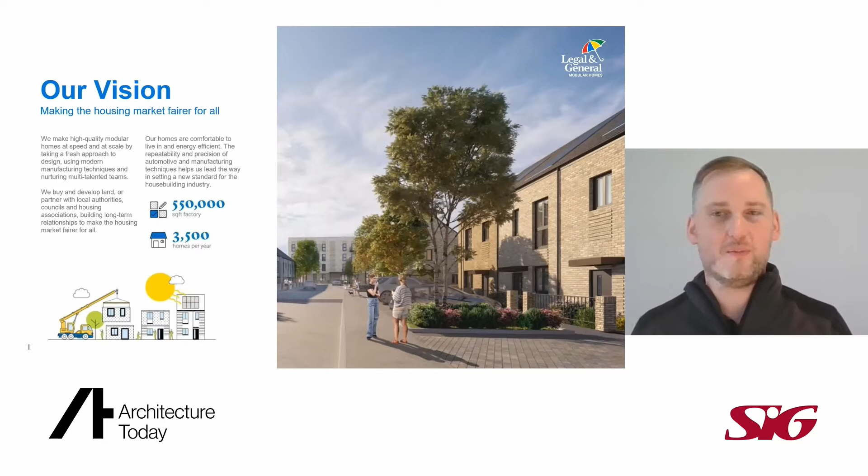We do this through a fully integrated delivery, having influence and stakeholder engagement right from planning all the way through the process, through design, production, construction on site, and then into sales and aftercare, ensuring that our customers have a great experience with us from the minute they engage with us through into occupying and living in their homes.

We do this through a mixture of in-house capability and partnering with third parties at pretty much all stages of this process, but really focusing on delivering high quality design, both in terms of product, place and process, to allow us to deliver on our commitments as we walk through the life cycle of a project.

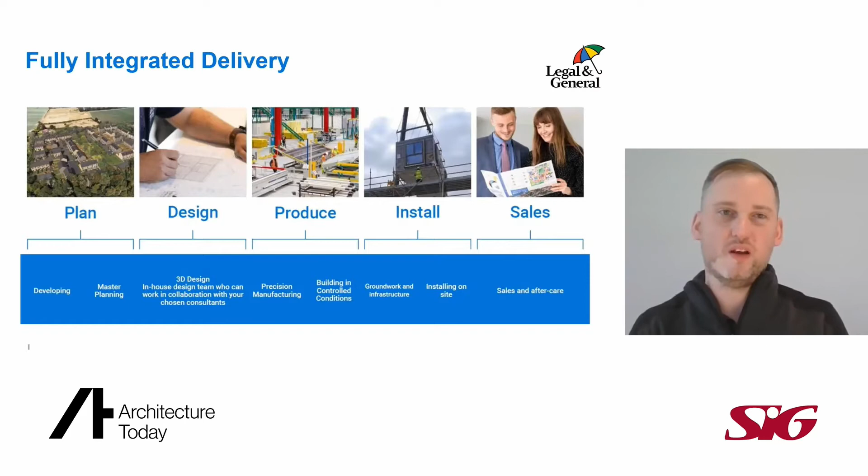Just to give you an overview of the products that we're developing, they're all underpinned by six key themes of comfort really, and ensuring that an end user values the space in which they live and call their home. So we start here with space standards, ensuring we achieve nationally described space standards across our products, providing high levels of acoustic performance and thermal comfort in excess of building regulations and minimum requirements, really looking to up the bar in what the consumer can achieve and expect to receive from their home as they occupy it.

And that moves into indoor air quality and daylighting, again ensuring high levels of comfort and operation within the homes as people use them. We achieve EPC A as standard, so moving that benchmark forwards through a fabric first approach, removal of gas and use of technology in terms of heat pumps for heating and hot water. We've already achieved that as a minimum baseline and can offer then net zero carbon as we move forwards towards a more sustainable future as an industry, we hope.

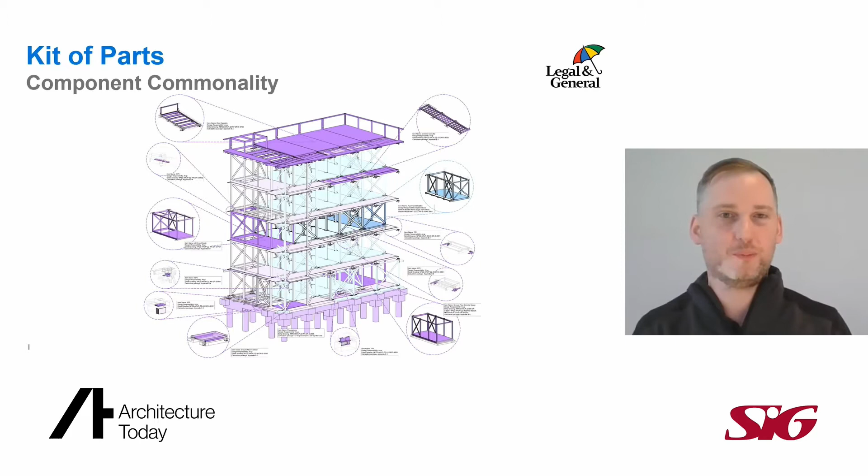We're able to get the throughput through our factory production line by limiting the amount of components we send into the factory. So working on that standard kit of parts. But then we put them together in ways that deliver different outputs. And what we have to negotiate here is the difference between customization and configuration. So the difference between defined choice and absolute choice, because we have to maintain a throughput through the factory, but also meet the customer requirements at the end of the journey.

This then starts to flow into site because the factory is only part of the puzzle really. The job isn't done when the module is complete. The modules have to come together, be constructed into buildings and finished from foundations through the install, into the facade and tie up into the roof, and then the external works that creates the development. And we take a similar approach to our sites. So that standard library of detailing, of interfaces, standard elements of work and standard processes that we roll out between all of our sites to ensure we deliver consistently.

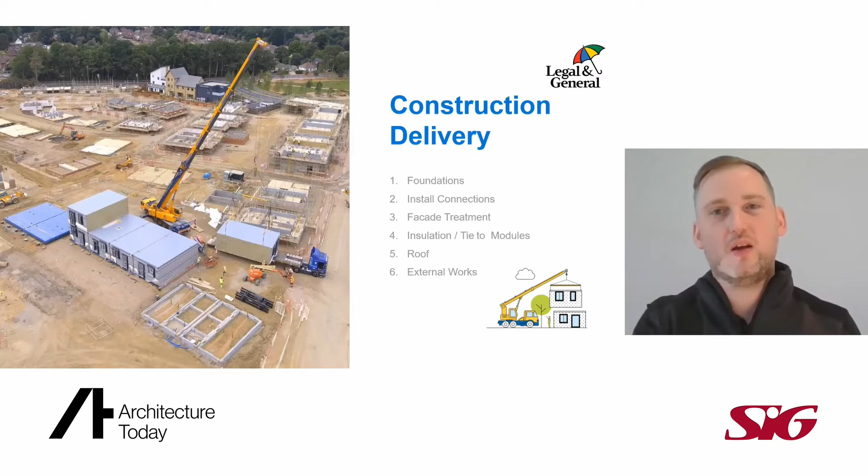So what you see on the screen there is really a visualization of our build process, starting from sub-assembly, taking as much complexity out of the online build and doing that in areas away from the line to allow us to purely drive assembly in a flow production route through the factory. We then have station by station set work repeatedly done. So regardless of which module we're building, they each reach the same level of maturity at the same point in the process.

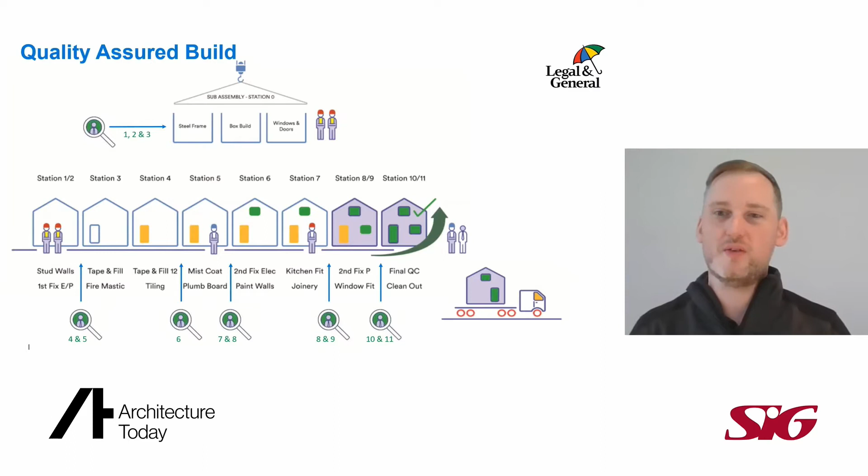And then at the base of the image there, the magnifying glasses are the quality checks that go into place. So this is really defining what we term as critical to quality, borrowing techniques from automotive and aerospace, where we look at critical failure modes, what could go wrong, and therefore what controls do we have to put in place so that we drive the right level of efficiency into the process.

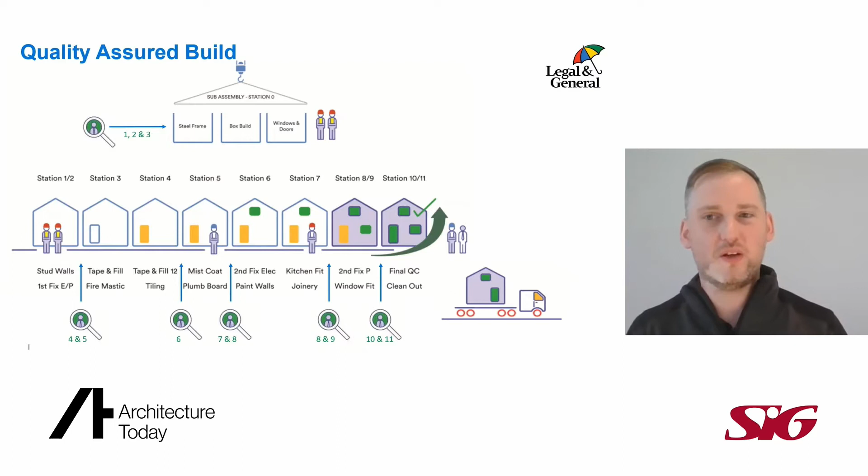So how the factory then takes the design, puts a construction process together, and then controls it is really key to us, going back to the beginning of this presentation, hitting the volumes we need to achieve, but hitting them in a repeatable way that consistently delivers quality to the end user. Because after all, this is about delivering fairness in the housing market and allowing people to up their expectation of what they should receive with a new build home.

We take the same approach on site, and traditional construction follows a similar process. We are engaged with the NHBC from a warranty provision point of view, so have formed our site processes in conjunction with their sign-off processes. And again, the graphic on the screen really visualises how that comes together. Again, control points at the right point in time to ensure that we don't carry a fault forward from one stage to the other. We avoid remedial works and rework from that perspective.

I think it'd be useful to then give you some context as to what does this look like in practice, and what does this look like as we build into a community. Because again, we've gone from the small parts of the construction into the modules that come out of the factory, into the dwellings that get put together on site. But they only work as a scheme when we can put them together into a community with a sense of place, with a sense of purpose, and with a sense of community being built into what we deliver.

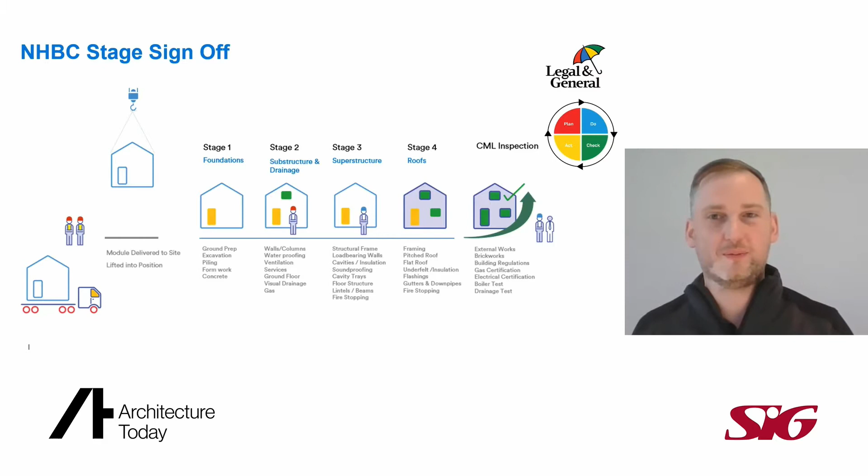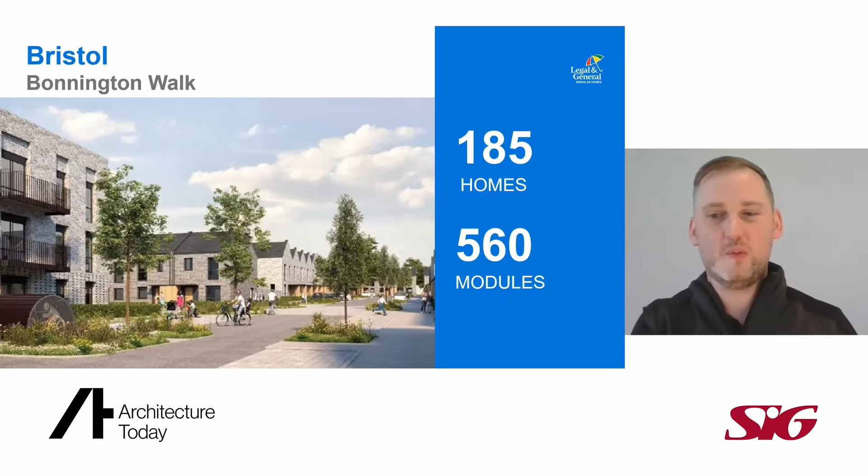So I'd just like to show you our site in Bristol, which is in Bonnington Walk, just north of the city centre. We are delivering 185 homes, and that takes around about 560 modules for that delivery. We are delivering a mixture of all of our product types. So you can see in the image there some houses in the background and an apartment building on the front left of the image. So 2 and 3 bedroom homes, 1 and 2 bedroom apartments.

The site itself was a piece of brownfield land located next to existing residential usage. There's a railway line to the south of the site, and areas of ecological interest within the large areas of trees, and also some protected species in there that we've relocated as part of this project.

And you can see from the layout, we're creating a space here that not only creates a place to live in your own home, but creates space around the dwellings to live in. So high focus on cycleways, pedestrian access, as well as the use of the car, creation of green spaces and spaces with different settings and different contexts to allow different usage as people go about their day-to-day lives.

And this is the intent as to what this will look and feel like as we work through the development. So real focus on how the public realm works in terms of hierarchy of transportation, use of green spaces and how the green spaces tie into the hard landscaping, and how we create a sense of character within what, to be honest, could be quite a stark, long street, but using features to break that up and create a sense of place and character.

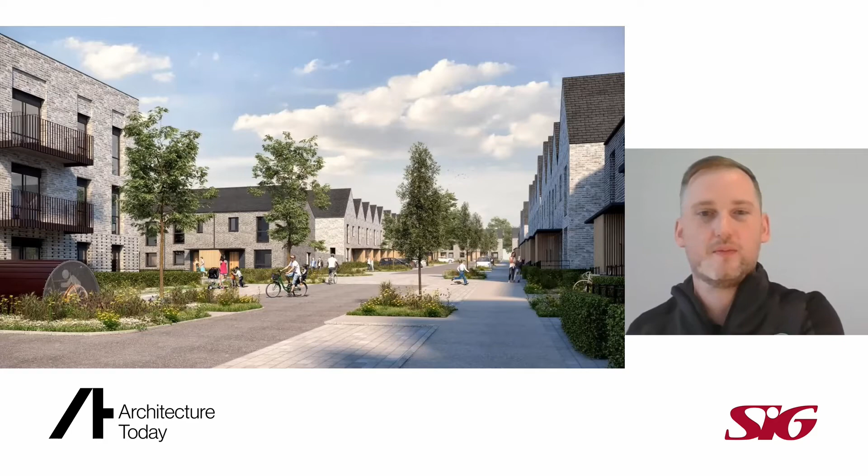And you can really see this in this layout where we can highlight the areas where there is density in terms of dwellings, where we have areas of green space that tie into the existing usage of the site and make great use of the natural features that were already there. How we've segregated cycle and pedestrian routes through the sites to ensure it's easily accessible for all users. And creating different spaces with different purposes.

So capitalising on the existing community orchard within the bottom section of the image there by allowing the provision of new allotment space and tying in with what was there already, creating community squares and gardens within the landscaping and breaking the landscaping up into different areas of different character. And then also creating an area within the landscaping for the protection of the existing ecology, some of which has been relocated as part of the works.

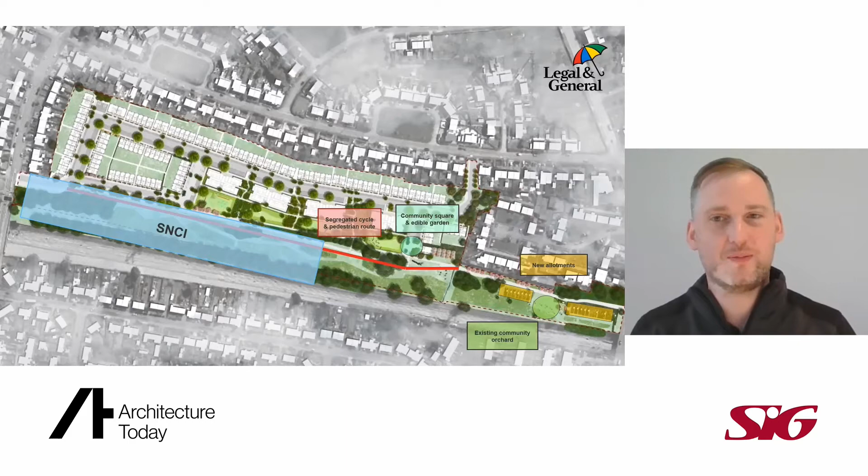And then from the 3D cut through here, you can start to get a feel as to how the site comes together with the provision of public open space, clear usage of the main thoroughfares for access, and then private space to the rear of the dwellings. And again, from the other side, really demonstrating the extent of open space within the development itself, offering people not just a place to live, but a community and a development with options as to how you live your life.

So we've talked a lot about the development and the product itself as a house type, but actually we think modular then extends to all elements of the build. We're currently delivering the houses in a modular way, but how do we transfer MMC kit of parts approaches into elements of the build that aren't the primary house itself? And I think a really good example of this that fits into not just the character of the development, but also how people live and our strong drive for sustainable development is actually how we've dealt with a specific component to deal with waste and recycling.

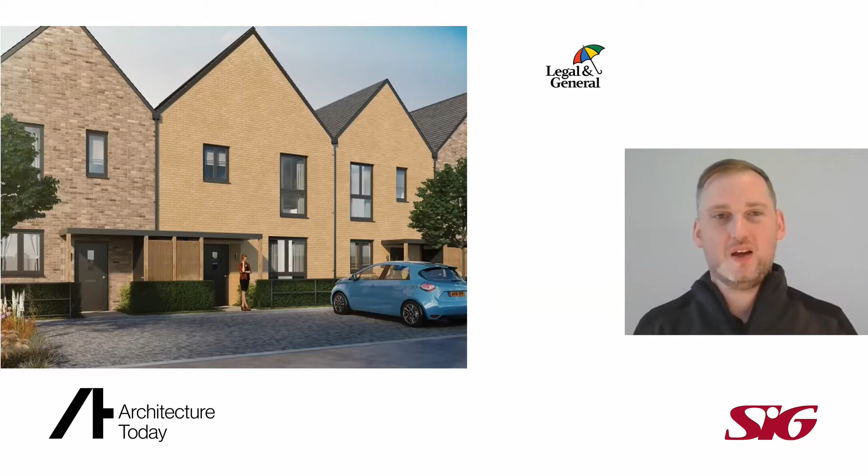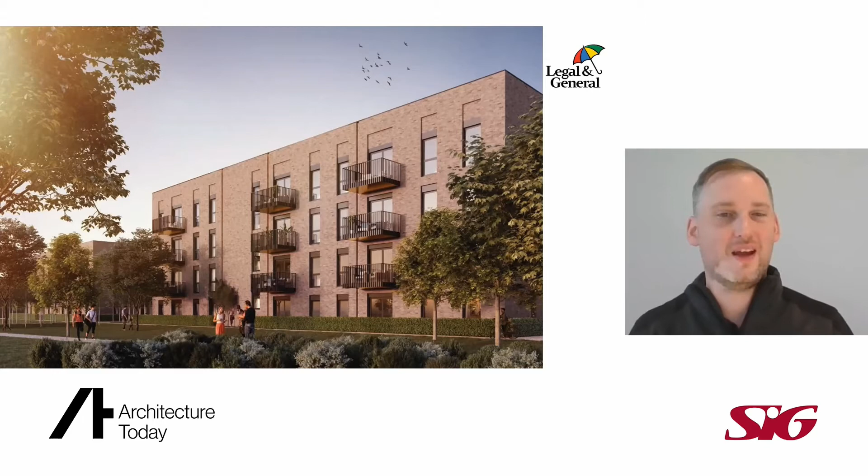And that then goes into the apartments themselves as well, and I'll touch on this later as we go through the build-up of the apartment and how we have bolt-ons to the core, so to speak, of the building that allow us to create variants both in the facade, the fenestration, and elements that are applied to the external elevation of the building.

So just to give you a walk through our products, these are the products that are being delivered in Bristol. So we have a 2-bedroom home. These generally are semi-detached or terraced, M4(2) compliant to NDSS standards. And you can see there from the layouts, spacious with clear provision for storage, and a functional layout that works with how people live within their homes. Again, exceeding very slightly NDSS standards.

I'm looking for elements that give an increased look and feel and feeling of comfort while you're within the building. So you'll see in the image on the top left, full height windows to the upper floors. And this is a really good example of us marrying together the construction process with adding value to the customer. So that window actually came about through integrating the design of the product with the design of how it is built. That's obviously a first floor module, and as we go down the line, we need access into the module to complete the works.

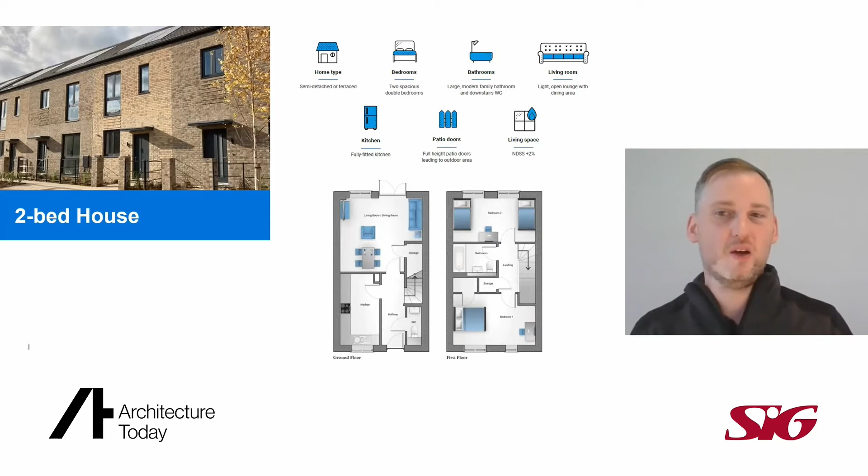So we had a full height opening in the module as a necessity of process. We could have filled that back in and put a normal window with a sill in, normal whatever that means in design context. But we chose actually to use the hole that was created by the process to then give us an enhanced design feature in terms of the full height glazing, which then gives a light and airy feeling in those upper floor rooms.

That then continues into the 3-bed, and you'll notice there's what is quite a solid, thick dividing line running top to bottom on those layouts. That's actually where 2 modules meet per floor. So our previous 2-bed house is 1 module on top of the other. This is 2 on top of 2.

Again, this then works the other way. This is process constraint driving the design. So the width of this dwelling as a single unit would be prohibitive in terms of transportation, access, and limiting our ability to get to sites. So there is a practical aspect here of breaking this elevation down into building blocks that are repeatably deliverable across a wide cross-section of the country without constraining development opportunities at a land-led level.

And again, you see a common theme here with the text at the top of the slides as to looking at comfort around space, open plan living, height, air quality, comfort, and making sure that people want to live in these houses. I think as MMC becomes more prominent and has done over the last few years, we're really challenging the preconceptions around modular housing.

And I think flashing back to the images I had at the beginning of the presentation, where you really can't tell the difference between the photograph of the show home and the CGI that was created in the process. It's that real commitment to quality that just doesn't mean that MMC is a faster but lower quality product. Actually, MMC can be a more repeatably delivered higher quality product as a result of the processes that we use.

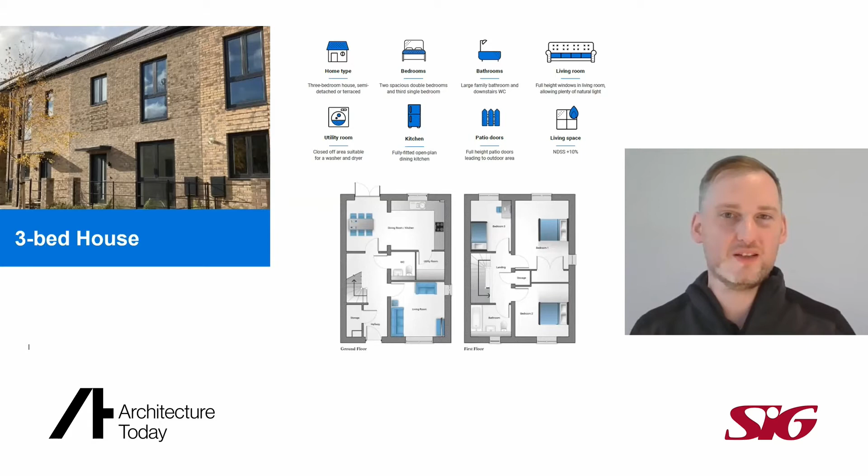And then the apartments really then demonstrate the next level of the kit of parts coming together. So again, similar themes throughout in terms of space, height, openness. But really here I want to talk about how the layouts between the 1-bedroom apartment on the left-hand side and the 2-bedroom apartment on the right-hand side allow us to use that standard kit of parts to develop quite a bit of variance.

So you'll notice as you go down, the single bedroom with the family bathroom off of the main living space is the same between the two, as is the module underneath it with the utility cupboard and half of the open plan living space. You then get down to the third module with the kitchen and the dining space in. The only real difference between the 1 bedroom and the 2 bedroom is the door and the service connection then into the ensuite, which is the 4th module.

So with 4 modules and the 3rd module having a minor variance, we can create 2 completely different properties, i.e. the 1 bed and the 2 bed. We then have a configuration where the 2 bed can come with or without the ensuite. And this is where we're driving configuration over customization. What are the allowable choices that allow us to get to a variety at a site level, but standardization in the build process? And where do those choices add value to the customer, be that a building owner and operator or an end user of the dwelling itself?

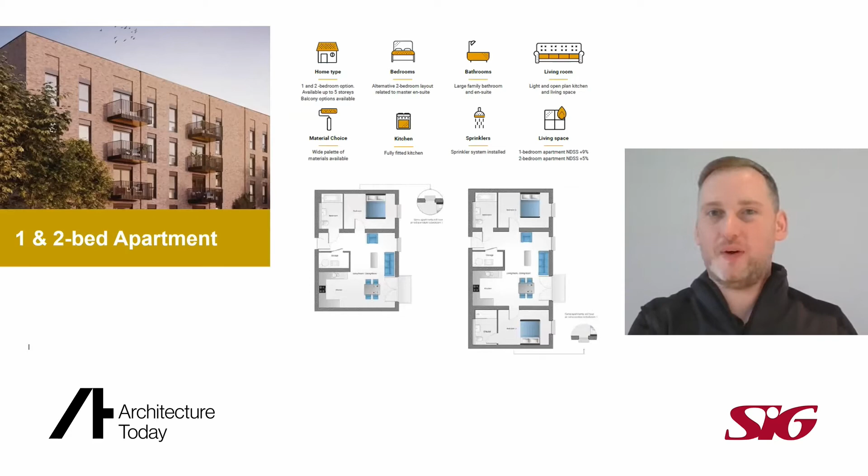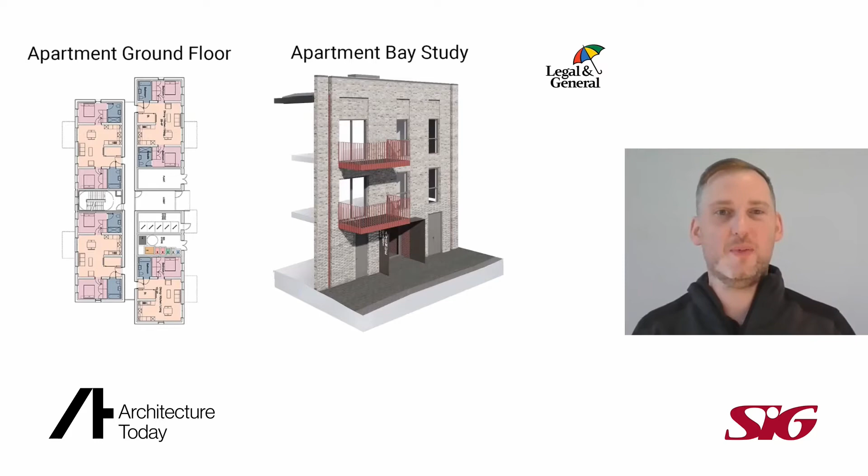And then again, looking at creating place and sense of identity by playing around and having some fun with the facade, really. The element we've got here is masonry, using different textures and coursing and shadow gaps and rebates to create interest in the elevation in what could, from that repeatable geometry, be quite a stark and bland elevation, but using simple and effective, to be honest, tried and tested details to build character into these buildings and really debunk that myth that all modular looks the same.

The project is called Vaux Living, and it forms part of the wider Riverside Sunderland Master Plan, which was commissioned by Sunderland City Council and their development partner Igloo Regeneration, and forms part of the wider ambitions of Sunderland to revitalise and regenerate the city centre. We've been working on the master plan together with FaulknerBrowns and Mawson Kerr Architects.

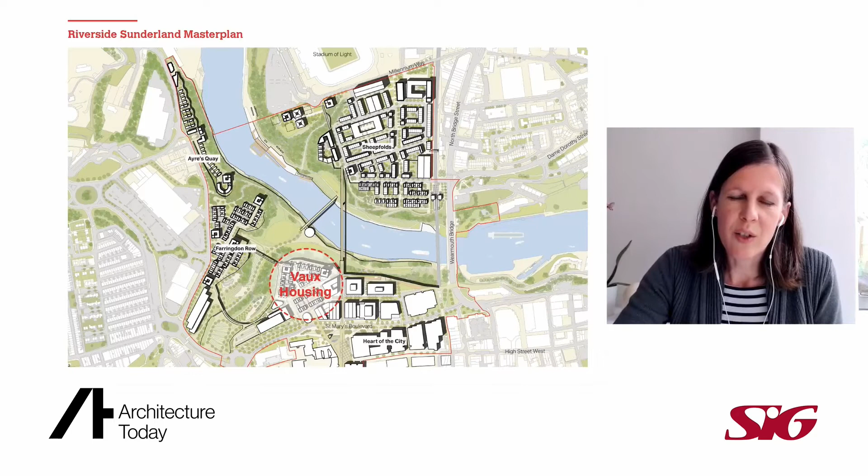And the overall master plan delivers around 1,000 new homes across 5 neighbourhoods, alongside up to 10,000 workplaces, green infrastructure, social infrastructure and community facilities. The Vaux neighbourhood itself sits right at the centre of the master plan on the former Vaux brewery site. The landscape in this location is really quite dramatic. The sides of the river Wear form really steep, tall cliff edges.

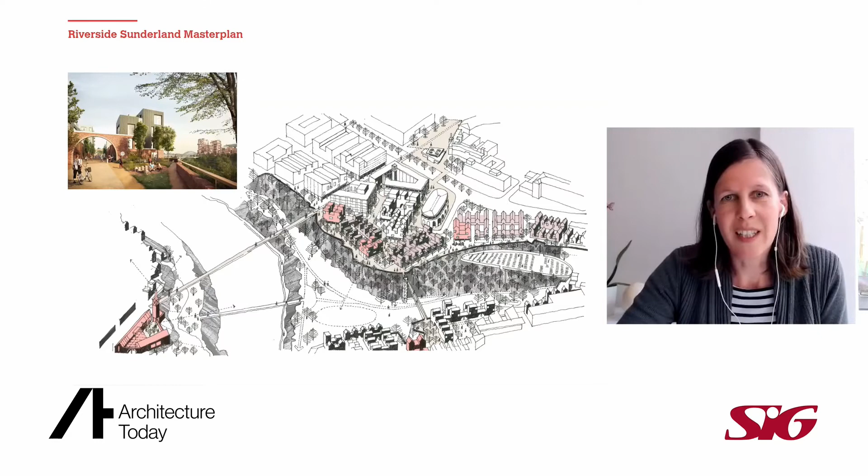The Vaux neighbourhood itself forms part of Sunderland's Future Living Expo, which is going to happen in 2023, and which showcases sustainable modern forms of living as part of the wider Sunderland regeneration. The neighbourhood offers 132 dwellings, 41 of which are apartments, and they're all arranged in smaller clusters. We're working on the project together with Moses & Co architects, and each architectural practice is designing one of the apartment buildings, which is shown here in red, and then some of the terraced housing and maisonettes within the clusters.

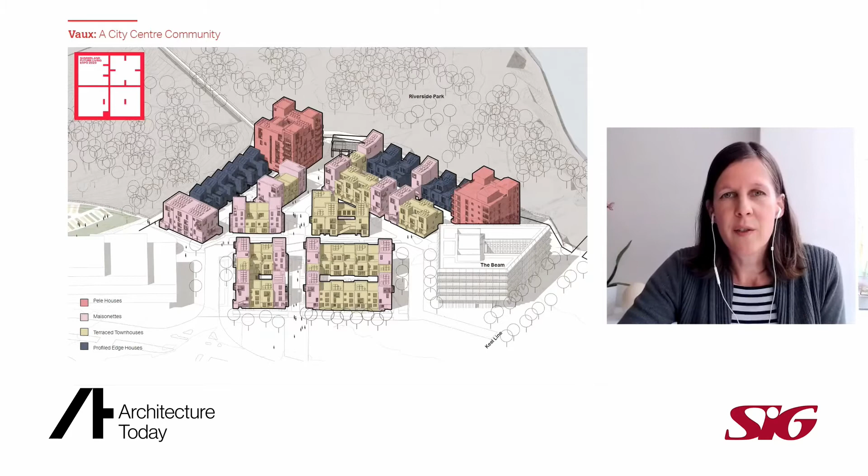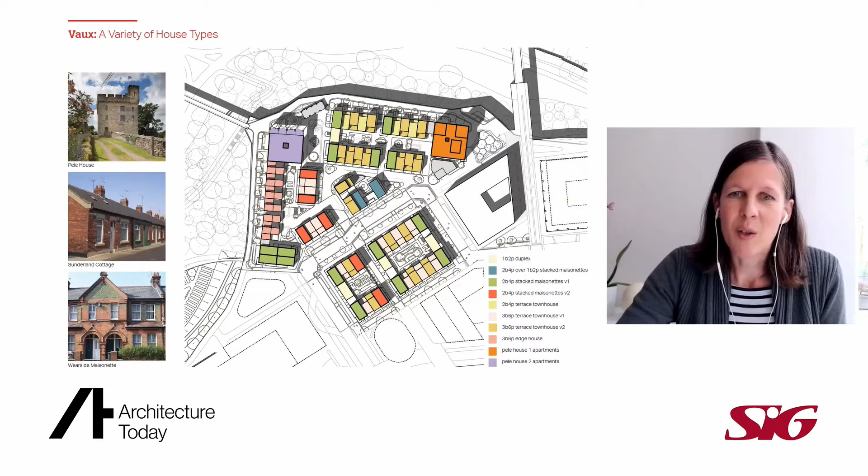The project is currently between stages 4 and 5, but I'm going to be talking about procurement in more detail later. There's quite a wide range of typologies on the site in line with the ambitions of the Sunderland Expo. And they're all based on historic Wearside typologies. So the apartment buildings have been inspired by traditional pele houses. You can see in the picture on the left. Then there's the Sunderland cottage, which we've used to develop our terraced house typologies. And then there's the Wearside maisonette, which has inspired our maisonette units at the end of each cluster.

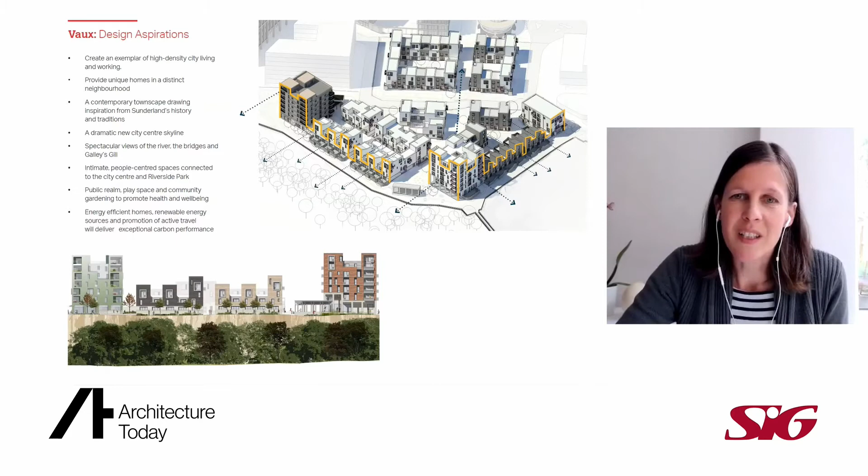In terms of overall design aspirations, we're trying to create a modern, sustainable neighbourhood where people can live an active and healthy lifestyle in a high-quality designed neighbourhood. The materiality is based on, again, the historic materials of Sunderland and of the site. So we've been looking at the tiles and the glass that used to be manufactured there and traditional colours and materials. And so there's a brick base that unifies all the buildings at ground floor level and ties everything together. And then on the upper levels, there's a mix of clay tile cladding in different colours and different sizes that gives variety to the elevation.

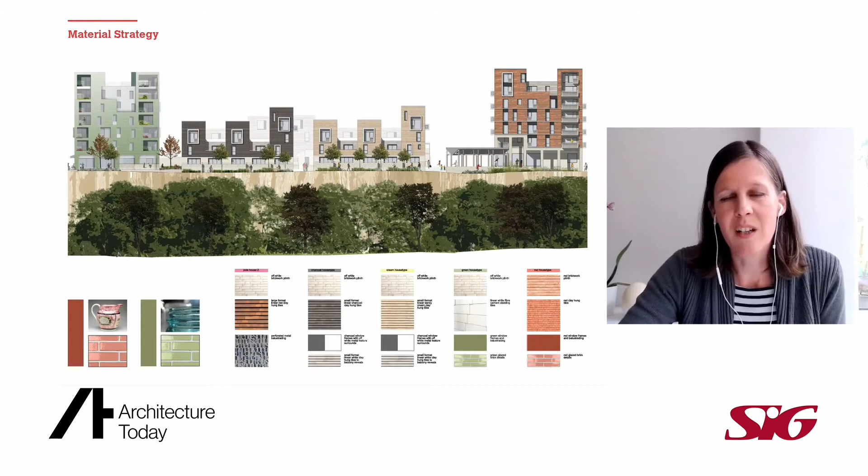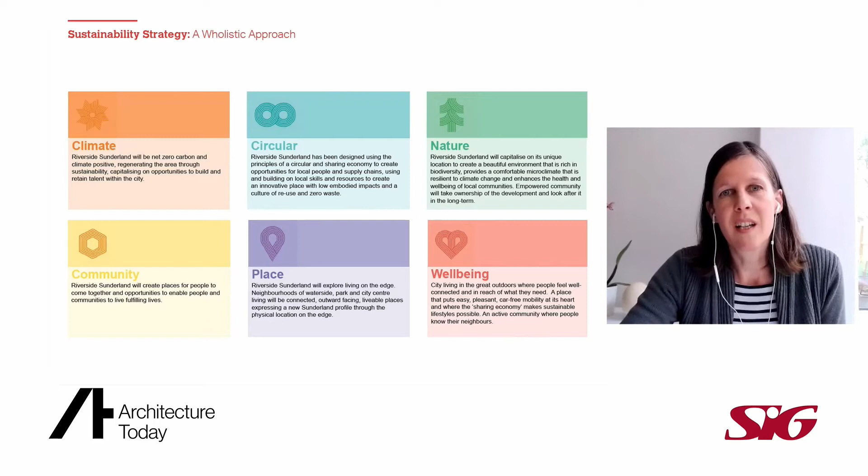Like all Igloo Regeneration projects, there's a very holistic design approach based on Igloo's footprint methodology that looks at the overall impact of the development on its environment. So we're looking at aspects like climate, circularity, the connection with nature, but also community, sense of place and well-being for the residents who are going to live in this neighbourhood.

The sustainability strategy forms a very important part of this, and the development employs a huge range of smart technologies. We've been looking into sustainable materials, locally sourced materials, and there's a whole life cycle assessment that's been done for the development. The external fabric of the buildings has got really high performance. We're going for a U value of 0.15, and one of the buildings is going to be Passive House certified, while the ambition is to employ the same Passive House standards for all the other buildings, including air tightness levels of 0.6.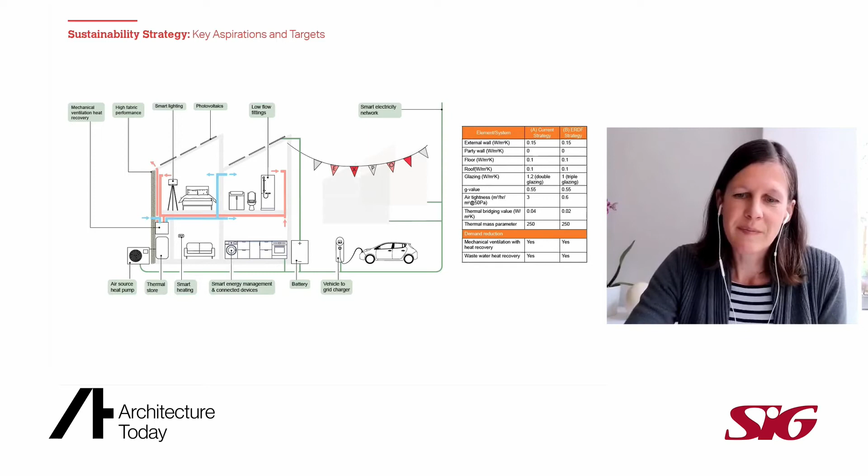It's also a car-free development, so apart from a few disabled bays, there's no parking within the neighbourhood, and all the parking will be happening in parking barns that can be reached within a few minutes by foot in an adjacent neighbourhood.

Another important part of the brief was modern methods of construction, and from the very beginning we've been talking about and looking into different types of MMC and fairly quickly settled on panelized construction methods, just because they give us more design flexibility than, for example, a volumetric approach. So the apartment blocks that are shown in red here and that we call the Pele houses will be constructed from a load-bearing light gauge steel frame system, whereas all the houses and maisonettes will be built in either a SIPS or timber frame system.

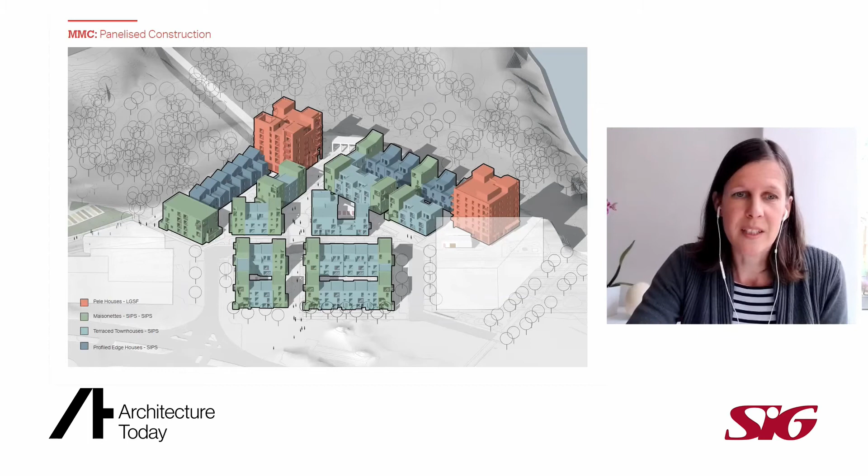Both the light gauge steel frame system and the timber frame system have got similar advantages in terms of ease of construction, logistics, construction speed, but also they're very accurate because they're being produced in a factory under factory conditions. There's less dependence on weather and on site conditions. There's less construction waste, both on site and in the factory, and they're made from recyclable and recycled materials. And also they give us pretty much the same design flexibility that we would have had with a traditional system. So they're both really good systems to work with.

I think in order to get the full benefits out of panelized construction, there's really two things to bear in mind. One is the program, because there are quite long lead-in times, so all the designs have to be finished quite early on. And the other thing is the involvement of the manufacturer, choosing the point in time when the team starts working with the actual manufacturer of the system.

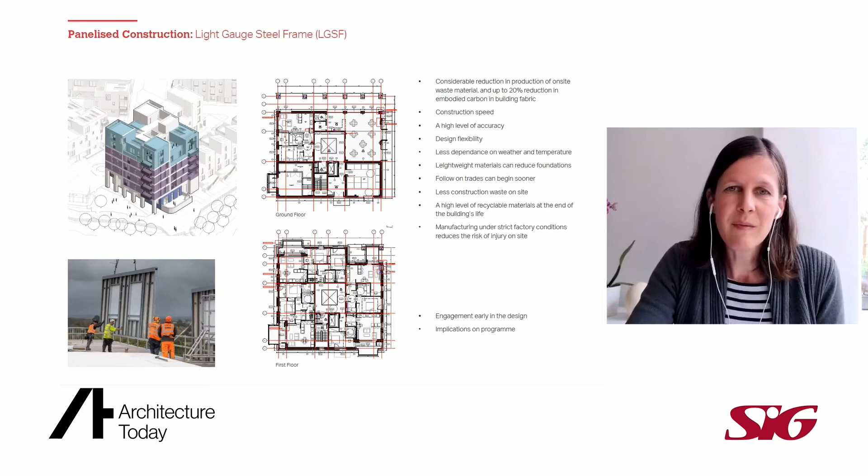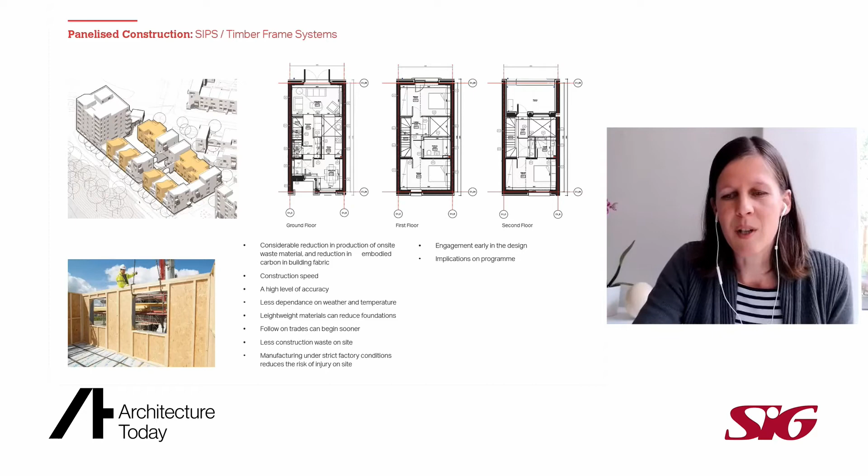And in our experience, the earlier this happens, the better, because these are highly developed systems and the manufacturers really know what they're doing and can really help with putting together the building and developing the details. And the later they come on board, the more complications you might have later on. And this is true both for the light gauge steel frame and for the timber frame as well. Possibly even more for the timber frame, because there is more variety in the market when it comes to timber frame systems.

Which leads me on to procurement. This is a design and build project which was procured as a two-stage tender with a pre-contract service agreement, PCSA. And it was tendered on a fairly robust and fairly well-detailed set of information, because as architects, we believe that it's really necessary to resolve quite a lot of the details at tender stage to be able to get the best value out of the contractor and the best design quality later on.

So the idea of this PCSA period is that during the time, which in this case lasts 3 to 4 months, the contractor will work very closely with both the client and the design team to firm up the design, to further develop the details, and to start working with specific contractors and subcontractors, if they're not already on board, to firm up the price and to be able to then give, at the end of the period, the client a much more accurate cost of the project.

So in this instance, we started working with the contractor, but they were really struggling, especially with finding a supplier for the timber frame. It was agreed at tender stage. We had a lot of discussions whether to already approach a particular manufacturer at stage 4 when we were drawing up the tender pack, to be able to work together with them and develop much more meaningful details. But it was decided in the end to not do this and to draw the framing systems in a quite generic way in order to keep the options open and allow the contractor to go to the wider market.

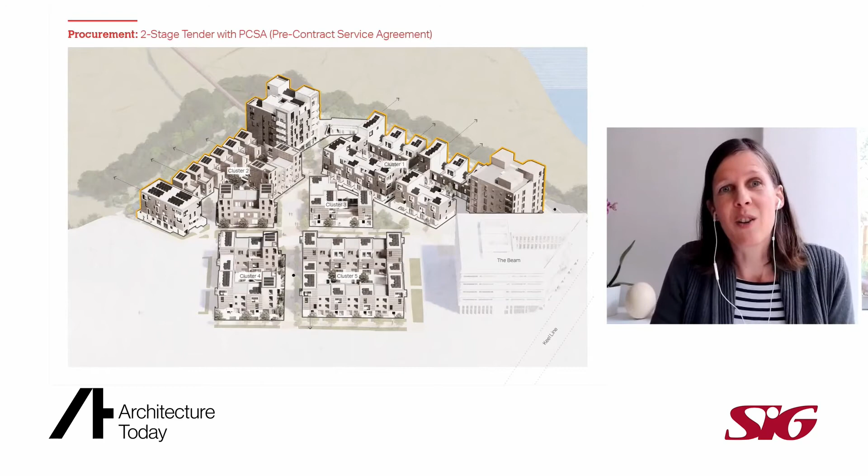But it meant that once we came to the PCSA period, the contractor started looking into the timber frame a bit more and realized that it was quite difficult to find someone who would be able to satisfy all the brief requirements, which were quite onerous. And whereas light gauge steel frame systems are quite similar in terms of what's available on the market, there's a lot of different SIP systems and timber frame systems. There's open timber frames that arrive on site without the insulation, and then the contractor will fill in the insulation and close them up. Or there's fully integrated SIP panels, which come fully insulated, sometimes with windows in them already.

And then there's differences in how the structure works. Sometimes they're fully structurally supported in themselves. Sometimes they need additional timber elements to help with the racking. And they all achieve slightly different U values, slightly different air tightnesses, and have different levels of certification.

Now, for this project, it was really important that everything is NHBC certified and approved. And there's actually not that many systems on the market that can do this. And I think the other main issue was the air tightness that we were trying to achieve. Because with the timber frame, it's really difficult to achieve 0.6 just with the timber frame alone. It always relies on work on site.

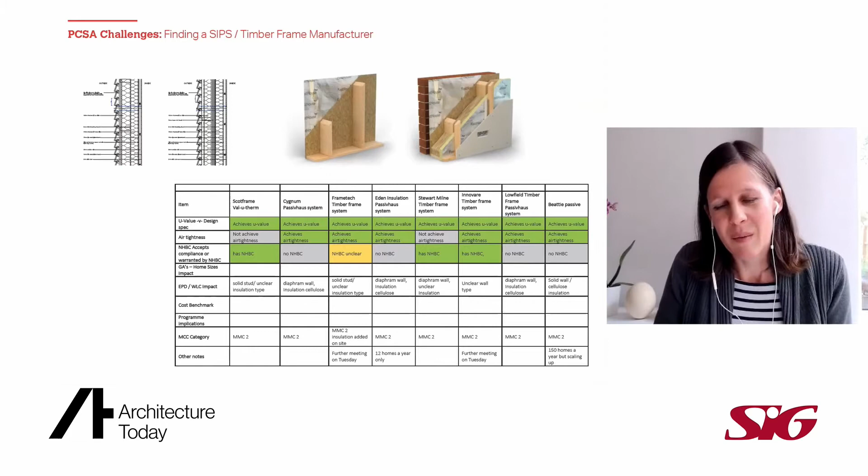So in hindsight, I think if we had been involved a lot more, if we had been able to approach a manufacturer at a much earlier point in time, it would have been much easier. So as a result of this, at the end of the PCSA period, we still really didn't have a timber frame manufacturer, and also the cost of the project had increased by nearly 50%, which was also to do with Brexit and COVID and the volatility of the market at the moment.

So we went through a fairly extensive VE exercise to reduce the cost, and it was decided to extend the PCSA period by another 4 to 5 months, during which we would then be able to work together with steel frame and timber frame subcontractors to develop the buildings a bit further. So the two biggest changes that we made to the design was we simplified some of the geometry to make it easier for, in particular, the timber frame to be constructed on site.

And we replaced the clay tile cladding on the upper levels of the building with brickwork, which works really well from a design point of view, but threw up more problems when it came to the timber frame construction, because the timber frame, while it can carry lightweight cladding, it cannot support brickwork where it doesn't go all the way down to the ground. So, for example, on side return elevations where the wall doesn't go down to the ground, we then had to look at different types of lightweight cladding.

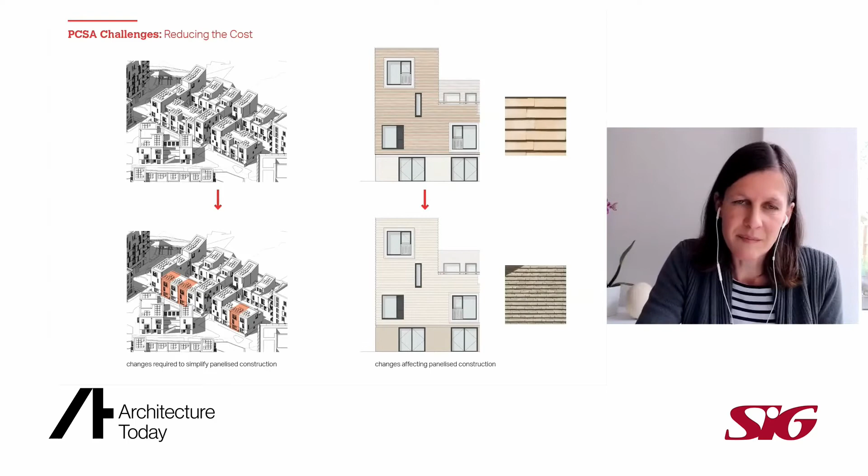And every timber frame manufacturer has got different test certificates for different types of cladding. So they can only put cladding on their houses that has been fully tested and certified. And the manufacturer we're working with at the moment, which is Donaldson Timber Systems, formerly known as Stewart Milne, they've got an amazing system, but they only have certification for 2 types of cladding, both of which are very limited.

Which is not only necessarily to do with the cost of the cladding tests, which are very expensive, but also the availability of the test rigs. At the moment, everyone wants to test their cladding for fire, so you have to book in these tests months in advance, which is time we don't have. So we're working on that at the moment to try and find a material that we can safely use, that is NHBC certified and also satisfies the planners and works with our project. So these are sort of the main hurdles we had to overcome.

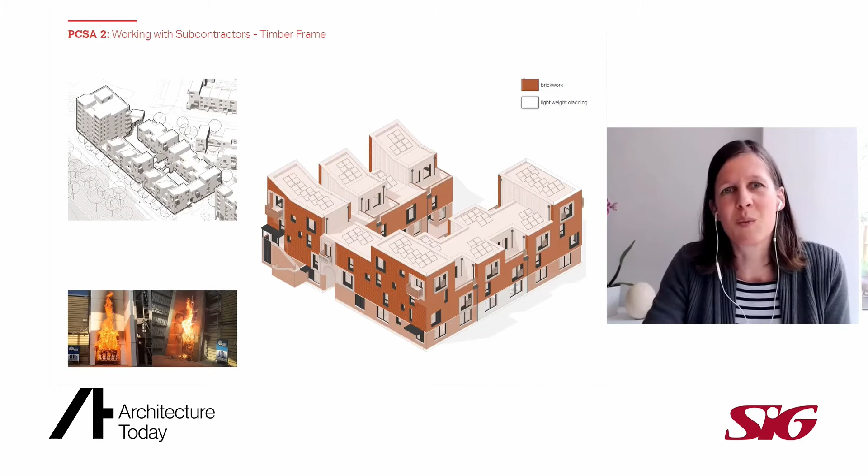But we're now working with the manufacturers, and it's brilliant because they really know what they're doing. They're helping us detail the buildings, and it's a really nice way of working because we can now finally resolve all the issues we had. We have got a closed, fully integrated timber frame system where the panels arrive fully insulated on site. They're closed in. They just need to be lifted into place and then clad from the outside.

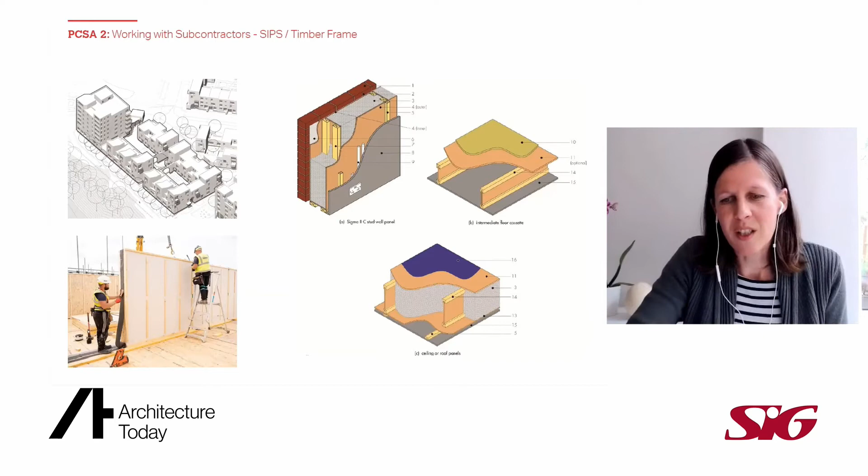In terms of the light gauge steel frame, it was a lot more straightforward because the systems available on the market are fairly comparable. The main obstacles we had with this are less to do with the steel frame, but more to do with, I think, the times we live in, due to the non-combustibility of the insulation, which makes the insulation really chunky, and the slenderness of the steel frame, which is only 100 mil thick.

We end up with a lot of external insulation and really thick walls, which from an architectural point of view is great because it gives us great big reveals. And also takes us back to the times of the old peel houses that did have really thick walls already. But from a technical point of view, it creates issues because it makes the cavity so wide that it's really hard to find cladding brackets that span all the way, fire breaks. All the things that bridge the cavity are just becoming really big for a 600 millimeter wide wall.

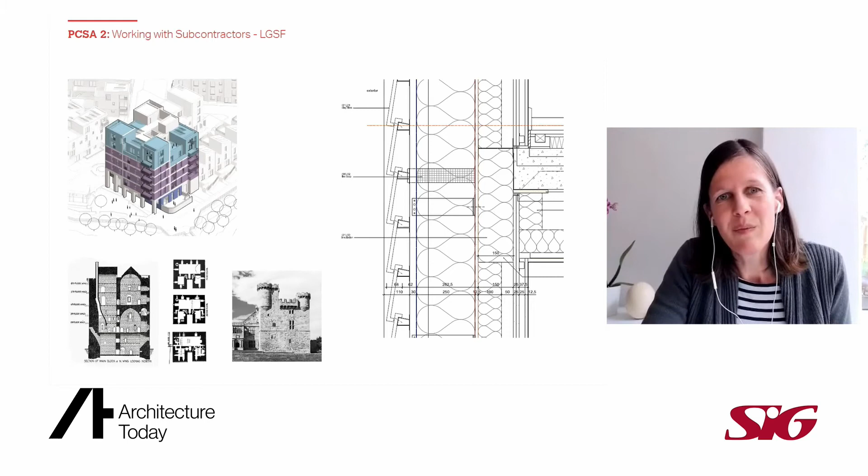So to summarize, we're really excited to be working with panelized prefabricated systems. It's really made it easy in a way for us to design the project, especially now that we're working together with the manufacturers. These systems are ever improving, they're getting better all the time. So we're very excited about carrying on working on this project and about the future and seeing what else is going to happen in the prefabricated panelized world.

So I think our advice would be to just start doing research really early on and be very clear about what you need the system to achieve, especially if the project has got quite ambitious performance targets like we had on Vaux. And there's a lot of really brilliant systems out there. They're just all slightly different. So it's really about finding the one that delivers the solution that is right for that particular project.

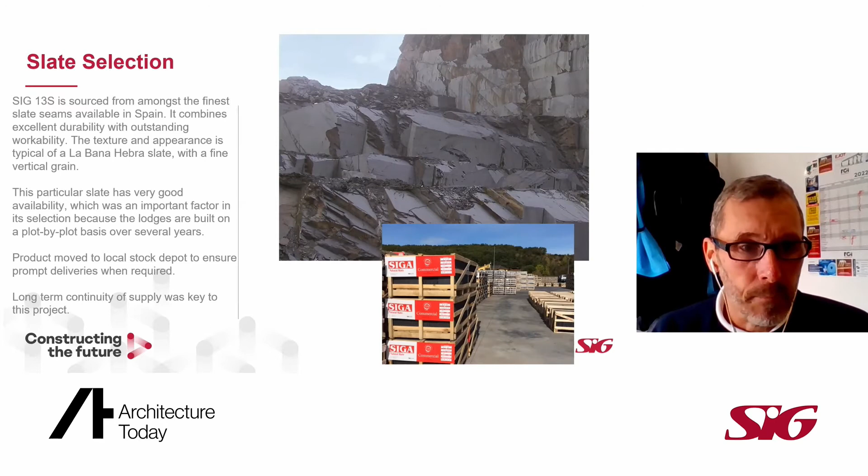One of the key things to take into account when selecting a natural slate also is the testing and accreditation. Now, the British standard for natural slate, which is BS EN 12326, is a very technical document. There's lots of details about the variation in sizes, the variation in flatness and so on. But the 3 key details that specifiers need to be aware of are the testing accreditations that you can see on the screen. So we have the W1 test, which is the frost resistance. So the slates are tested for their water absorption.

The thermal cycle: you do sometimes get inclusions in natural slates. Often the gold ones are known as fool's gold, but they're pyrites. And they are tested; a wetting and drying process is carried out to see whether or not they will cause discoloration on the slate surface. And then sulfur dioxide testing, which is like an acid rain test, just to see how the material will last over a certain period of years if it's in a city that has high levels of pollution. Generally, and it's very much a generalization, Spanish slate scores very highly on all of these.

The only one to be aware of is the thermal cycle. There are some T2 products available on the market at the very budget end of the price range. As always with these things, if the price seems too good to be true, then the chances are it probably is. So that's just the one to be aware of. All slates then do need to have a declaration of performance, and these details that you can see on the screen where we're showing the test results, they are also printed out in a smaller format, and every crate of slate that comes into the UK from Spain or from Brazil, for example, will have that documentation attached to the crates.

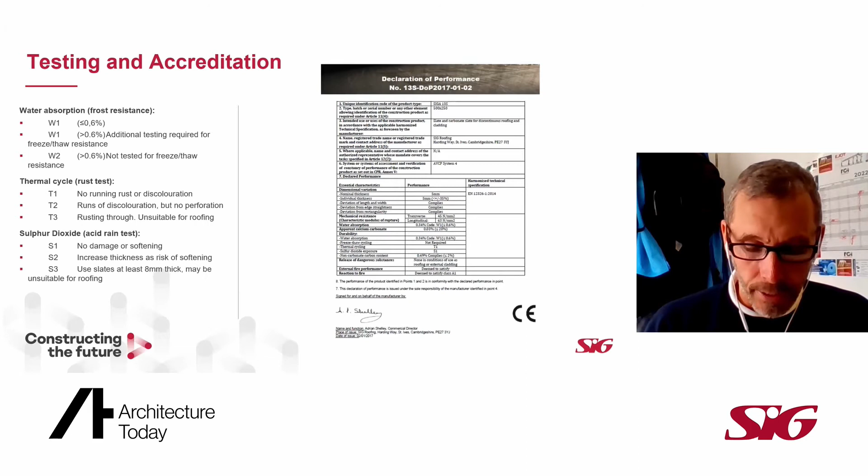So going back to the project at the Cotswold Water Park, one of the design features on this roof is that the main roof is at a standard sort of pitch. So at the higher level, we're looking at 30 degrees plus, and at the lower level, we're looking down towards 22.5 or 25 degrees for a wraparound area on a lower level. Now, as you can see from the picture and the chart on screen, these details will vary depending on which part of the UK your project is based.

Now, as you can see, the Cotswolds are in the sort of bluey grey area down in the southwest, and that means we require a higher level of headlap and batten gauge for the product, and also the sizing will be slightly different. In the western part of the UK, the minimum pitch requirement for a 500 by 250 slate is 30 degrees with just under 100 millimetre headlap. Now, once you go below that pitch, you need to start looking at a wider slate, a 500 by 300, which can bring that down all the way to 22.5 degrees at a 130 millimetre headlap.

Now, in the eastern side of the country, which I'm not showing at the moment because it's not relevant to the project, there's about a 5 degree difference. So you can have a 500 by 250 millimetre slate that will come all the way down to 25 degrees and slightly lower pitch on the larger slate as well.

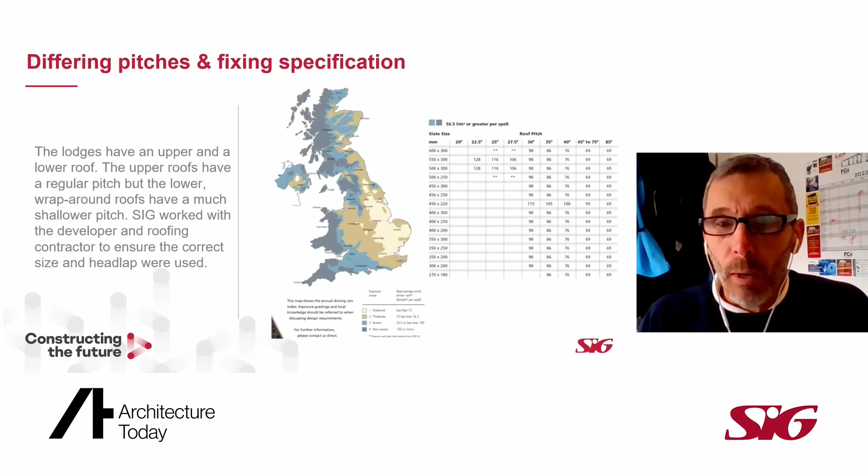If you wish to go below these pitches, there are products on the market. There's one or two systems out there which effectively take that weatherproofing away from the slate. So sometimes it's a neoprene strip that will go up in between the slates itself. Sometimes you get specialist underlays to go underneath that. But again, both of them are taking that weatherproofing warranty away from the slate and onto their own product.

So just to summarise, it's very important to get involved early with regards to the product pipeline and making sure that the product that you're selecting has enough volume and has enough material running through a period of time to keep your site supplied and have enough of what you need on the ground as it's required.

It's also best to speak to somebody regarding the fixing specification. Different parts of the country require different size slates sometimes and require different headlaps and gauges. And obviously, if that can be arranged early on in the process, then when the project goes out to tender, all the roofing contractors and subcontractors will be pricing for the same specification. And that makes it a lot easier, so there's no surprises further down the line.

As I've said previously, we can help with the selection of the quarry so that you can have the right product for the right project. As I said, if you've got a project that's running over several years, we can steer you towards the bigger quarries that are supplying large volumes of materials, and we know they have a good lifespan within them.

If it's a one-off project, if you're doing a one-off house, for example, again, you may have a bit more choice because we can look at what's on the ground immediately and then give you some variation into what you want to supply straight away.

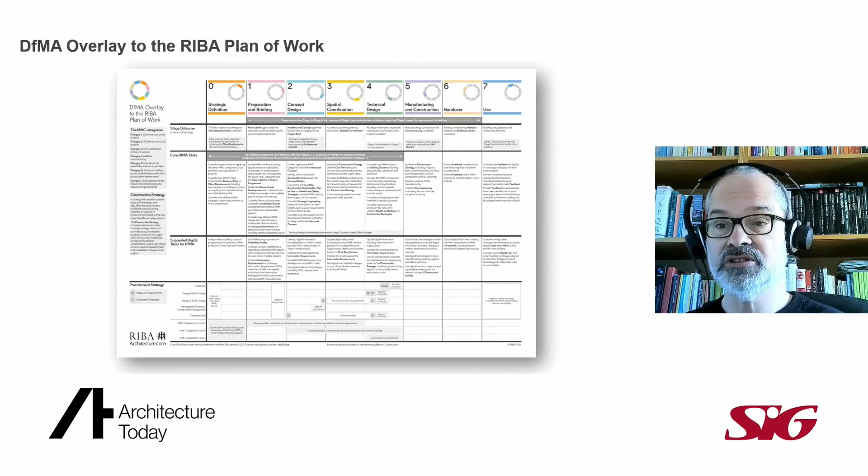For those who haven't seen the overlay, you will no doubt recognise the plan of work format with the 8 work stages from 0 through to 7. The overlay quite simply puts design for manufacture and assembly activities against each of these stages, as well as giving other guidance. And many practitioners and contractors use it to guide their workflow and project programming. The accompanying report gave us the opportunity to cover quite a lot of ground.

So obviously, to explain for the uninitiated what DFMA is all about, to set out the MMC categories, which I outlined just now. So important, I think, to have a common vocabulary. We wanted, through case studies, to demonstrate that offsite need not curtail creativity, and in fact can be a driver for quality. And I think the case studies we put in the report demonstrate that pretty well.

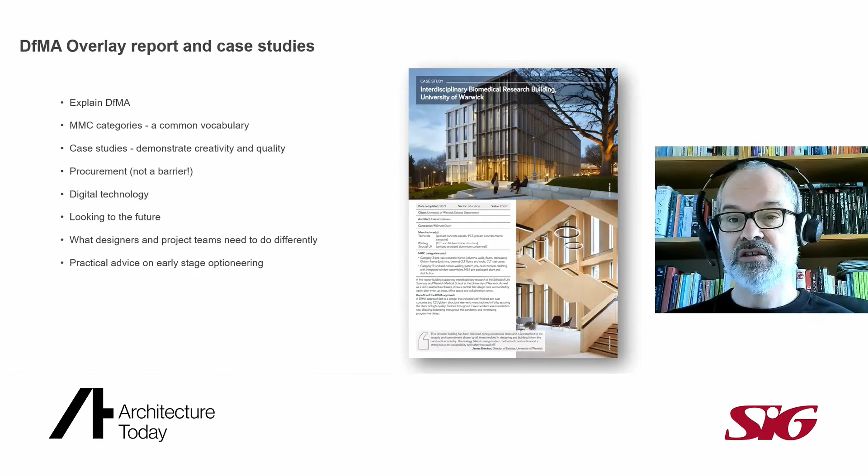We wanted to emphasize the close ties with digital technology. We wanted to show how procurement need not be a barrier to MMC, and we wanted to look to the future to see what that might bring. In particular, we wanted to set out what designers and project teams need to do differently, and to provide practical advice on the early stage optioneering process, which is so critical to the success of a DFMA approach.

In the report, we introduced the role of MMC advisor. We say that it's a role that can be carried out by the architect, where they have the necessary knowledge, or indeed the client if they do, or it could be a specialist. But it emphasized the need for different thinking, and that the opportunity for delivering value through MMC can be lost if decisions are made too late.

So on that basis, we've developed this matrix showing when the different actors in the project team, including the MMC advisor, need to be brought in, and when design freeze needs to happen for each of the various MMC categories. The bars show when ideally that organization would start their involvement, and then the latest time is where the bar changes from blue to green, and then when they would finish is at the end of the bar. The pink line shows notional planning approval during RIBA stage 3, and the yellow when you need a design freeze, which varies for the different categories.

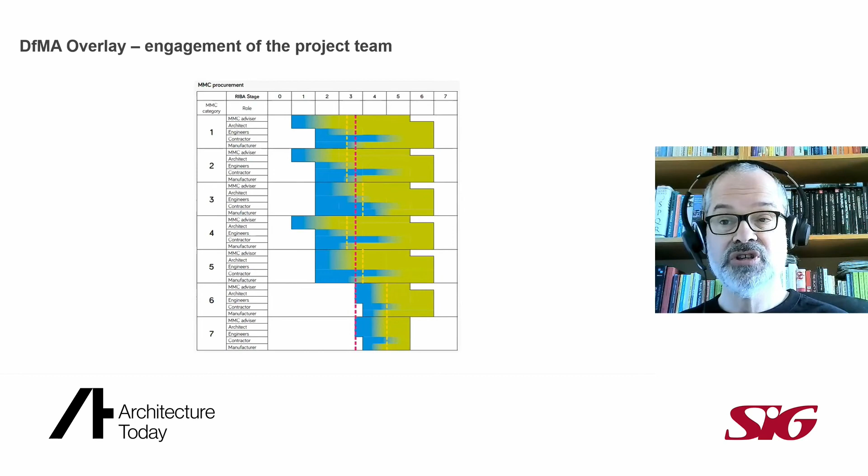A big point to note here is the need for collaboration. MMC really cannot happen if the design team and the manufacturers do not work closely together. So anyway, this is all available to download, and you can find it by just searching RIBA DFMA overlay.

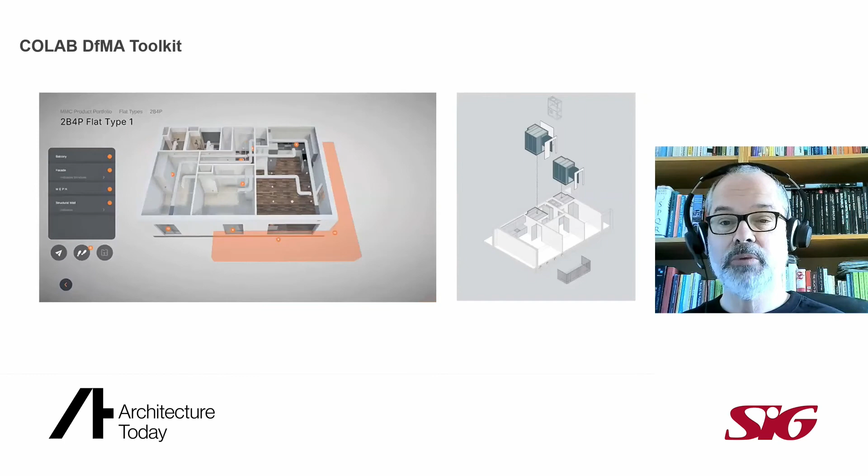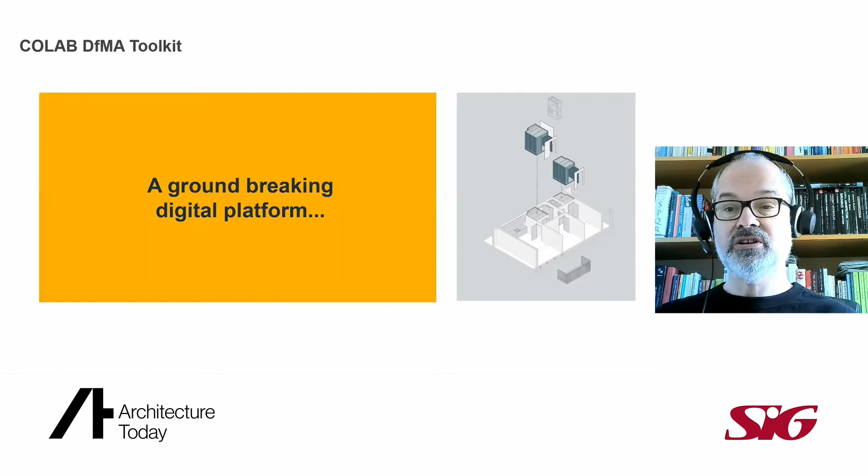So next, I want to tell you about an exciting piece of software that we've developed as part of the Colab Consortium, a partnership between L&Q, who you will know as one of the largest housing associations, technology company Virtual Viewing, HTA Design, and Hawkins Brown. We set up the consortium in 2020, and we were awarded funding by Innovate UK under the Transforming UK Construction competition. And our proposal was to develop a digital solution to address some of the key issues facing the construction industry.

The toolkit, which we launched in December last year, is going to enable house builders and their design teams to store digital portfolios of offsite manufactured products, including house types and flat types. It will enable them to source materials and also to capture data to inform decision making. We're hoping it will help overcome some of the barriers to MMC by encouraging housing associations to think about the building process early on. All too often, as you'll be aware, offsite is only considered once the design has been drawn up, and by this point the benefits often can't be realized, and it works out more expensive than traditional construction. It will also bring efficiency to the design process through the use of standardization.

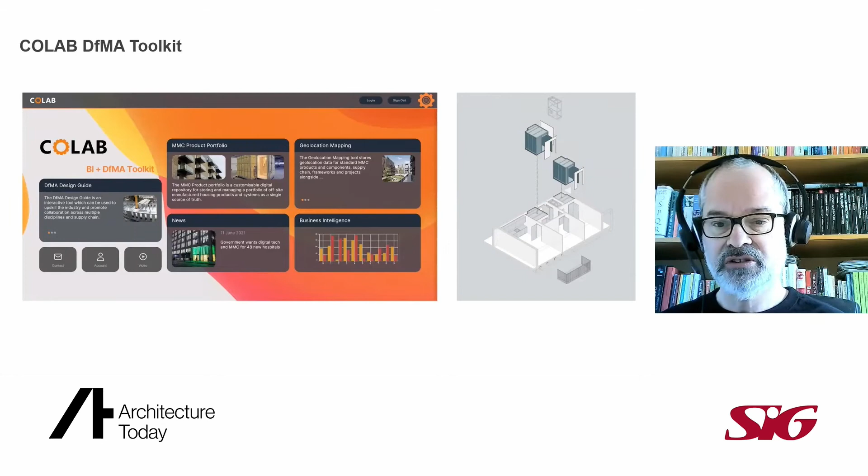So it will act as a central portal that gives access to design information and 3D model information that can be used by project teams in developing their design, and allows them to select the products or components such as balconies, bathrooms, and indeed whole apartments from a set of standard products. We estimate that this toolkit could speed up design and construction programs by 30%, so it could offer significant improvements in productivity.

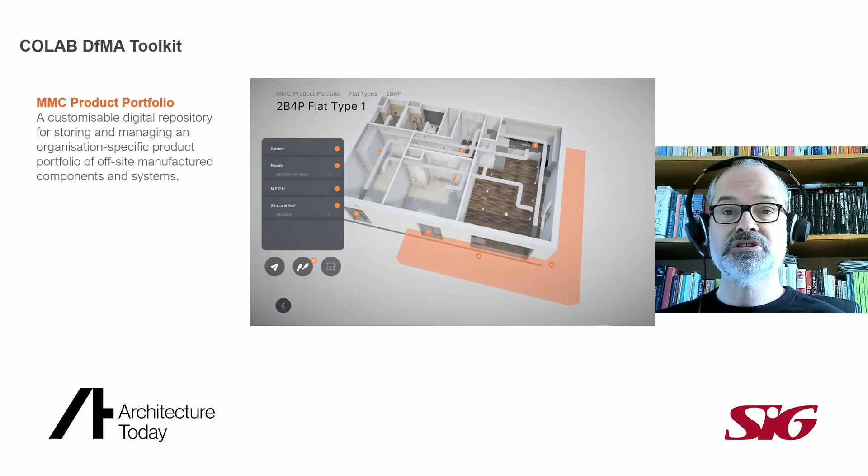The standardization that underpins the toolkit is based on L&Q's production innovation roadmap, which sets out their ambition to develop a portfolio of MMC products, systems, and procedures, and to follow a product and portfolio way of thinking rather than looking at each project as a bespoke brief. By doing this, they will be looking to deliver more certainty on cost and quality, improve efficiency and productivity, and to deliver at scale whilst reducing risk.

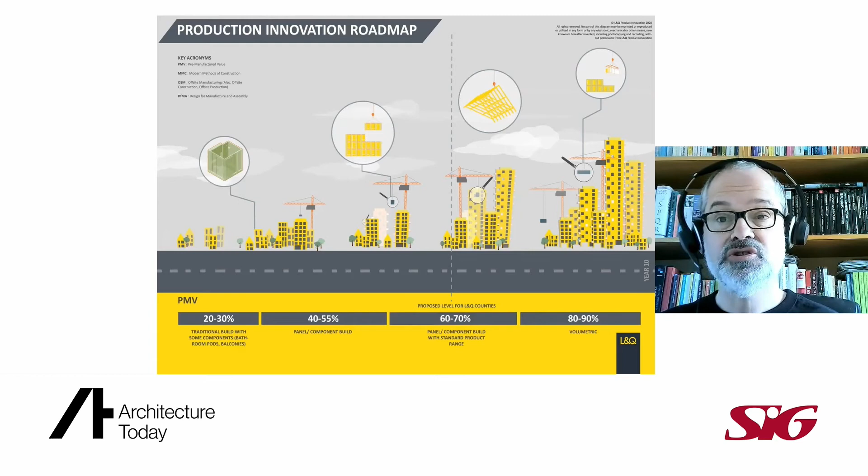So if you'd like to take a look at it, just download it from Windows or the App Store. What we've developed here is a proof of concept, and it's now ready for organisations to develop their own digital assets and use the app or something like it as a platform to provide a single source of truth for their own portfolio of off-site products.

I said I'd touch on pre-manufactured value, or PMV. This is an extract from the government's guidance published back in 2019, but although it was a while ago, I think it's still something many people aren't familiar with. For those who are, bear with me for a moment.

Pre-manufactured value is the financial proportion of a construction project's gross construction cost derived through pre-manufacturing. Pre-manufacturing includes all costs incurred prior to the final installation of the construction work phase, including all materials, the total labour applied in the pre-manufacturing process, fixed and variable manufacturing overheads and associated plant, logistics and transportation costs. By gross construction costs, we mean all pre-manufactured costs, on-site labour costs, all preliminaries costs, overhead, profit and risk.

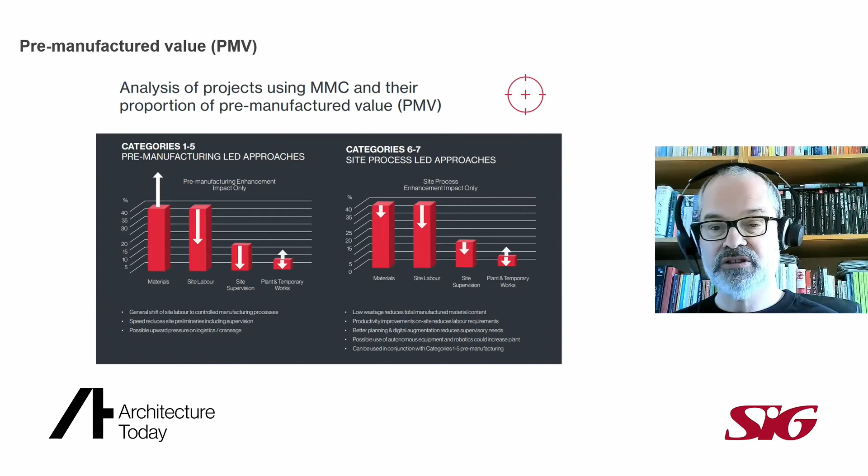So we're measuring PMV not just for the sake of it, but because it's a proxy measure of a range of benefits against a traditional approach. So PMV then is a percentage, effectively the off-site cost divided by the total cost.

So just to conclude this, I'm going to talk about Hawkins Brown's recently completed project, plot N06 at East Village in Stratford, overlooking the Olympic Park, which utilises several category 3 and 5 modern methods of construction, and in some cases a combination of the two. It's a build to rent project for Get Living, providing 524 homes across 2 towers of 26 and 31 stories. You can see the towers are linked halfway up with a double height sky bridge, and this contains the main communal amenity space in addition to those that are on the roof.

The project was delivered by Mace, who emerged as the preferred main contractor on the project early in RIBA stage 4. At that time, they were building an adjacent high-rise scheme using their jump factory system, but this had some limitations, and they were looking into the next iteration of high-rise construction based on a system being used in Australia called Hickory.

So just to reiterate, within the government definition framework, category 3 encompasses many types of prefabricated primary structure and substructure, shifting away from reliance on in situ works as far as possible. This is the definition of the MMC framework. So it talks about use of pre-manufactured structural members made of framed or mass engineered timber, or hot or cold rolled steel, or precast concrete. And it includes load-bearing beams, columns, walls, core structures and slabs that are not substantially in situ constructed and not part of a systemized design.

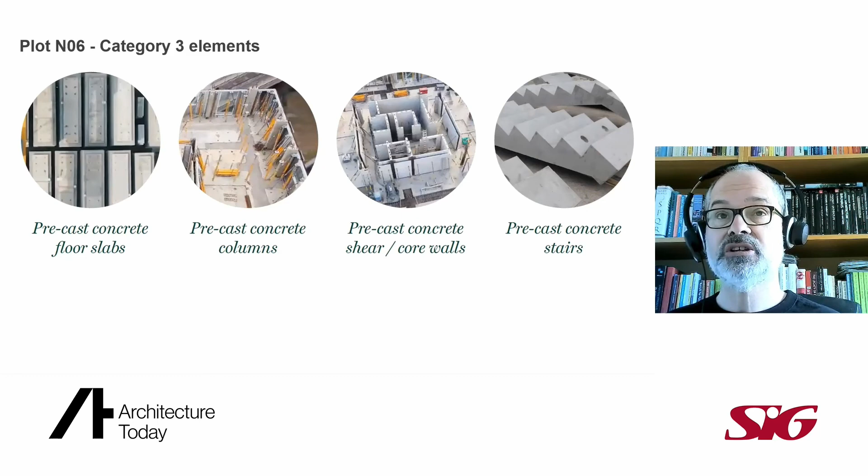MMC Category 5 covers non-structural assemblies and sub-assemblies, including walling systems and mini-volumetrics. This is the definition from the MMC framework. It talks about a series of different pre-manufacturing approaches that includes unitized non-structural walling systems, roofing finish cassettes or assemblies, non-load-bearing mini-volumetric units used for things like kitchens, bathroom pods, utility cupboards, risers and so on, as well as preformed wiring looms and so on.

At East Village, this included the aluminium unitized curtain wall facade with GRC attachments, bathroom and utility pods, 3-story riser modules, and many of the primary horizontal service runs up to each apartment. Obviously, there's a great opportunity for quality control using bathroom and utility cupboard pods, because the products can be inspected before leaving the factory. Additionally, we found that by limiting the number of pod types, we could really streamline the benchmarking and production process. And with a high degree of repetition, the future maintenance of these and other elements becomes much more efficient. And this is really important for Get Living as the operator of the buildings in the long term.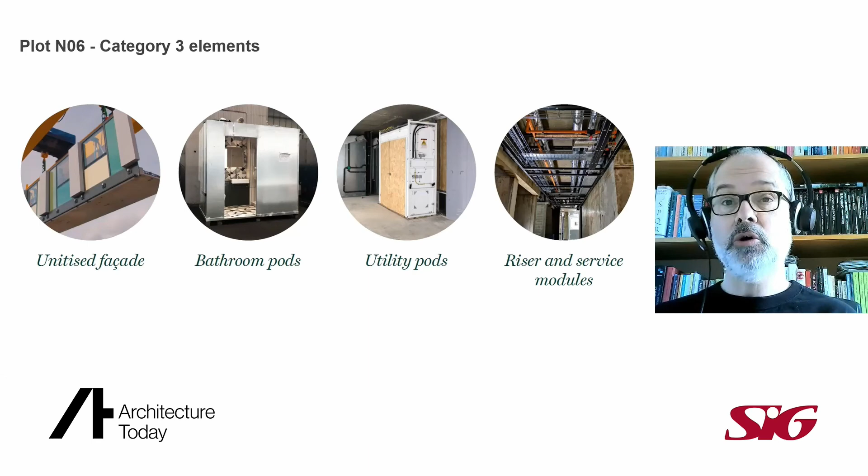Getting early engagement with the main contractor and input from their supply chain was really beneficial, and allowed us to reach a higher degree of resolution early on to support the off-site manufacturing lead times.

Bathroom pods can be considered for almost any residential project, really, and are well suited to this sort of approach with their repetitive nature. The main considerations as a designer are to factor in enough tolerance for varying wall and floor build-ups between manufacturers, and to consider the sequence of installation so that access is allowed for final connections when the pod is shifted to its final location on the floor plate.

However, the unique approach that was taken at East Village was the combination of the Category 3 floor slab with Category 5 facade as part of Mace's high-rise solution, which also factored in the mini volumetric elements. The unitized facade was pre-attached to floor slab units at a holding facility in Norfolk, then loaded onto the back of an articulated lorry and dispatched to site.

Similarly, the horizontal service modules were pre-attached to the underside of the corridor slabs surrounding the cores. Once the delivery arrived on site, within its defined time slot, it would be attached to one of the 5 tower cranes and then lifted to its designated position.

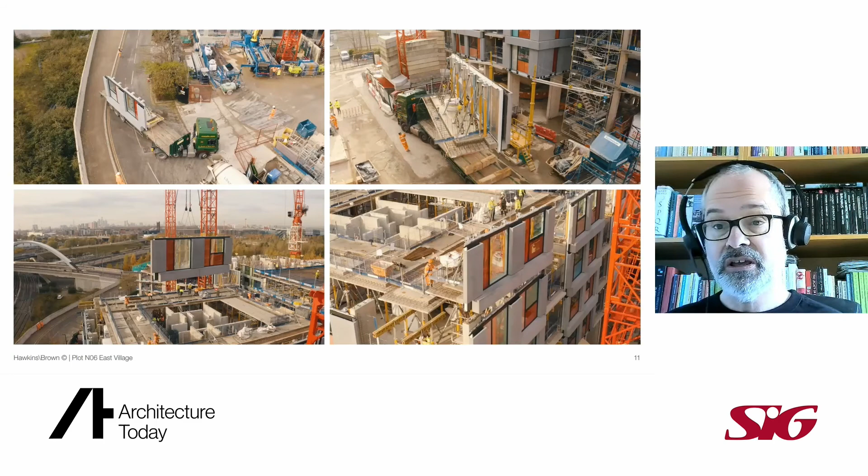We estimate that producing these assemblies off-site, tracking each asset digitally and dispatching for just-in-time delivery has reduced vehicle movement by at least 40% over traditional builds, so significantly reducing environmental disruption and noise and pollution around the site, and reducing disruption to nearby existing residents and businesses.

And once the construction process had gathered full momentum, Mace achieved a 5-day cycle with 1 floor being installed each week. They developed a sort of production line ethos with each interfacing trade understanding their timescales and responsibilities to be able to pass the baton on to the next one.

The key advantage of this approach is that once the combined slab and facade units are in place, there is a complete envelope around the slab perimeter, almost eliminating the need for temporary edge protection and offering a safe working environment for operatives, which, of course, is an important factor when constructing tall buildings. There are also further environmental benefits, because site wastage was reduced by an estimated 75% over traditional build, with everything arriving pre-assembled or cut to size.

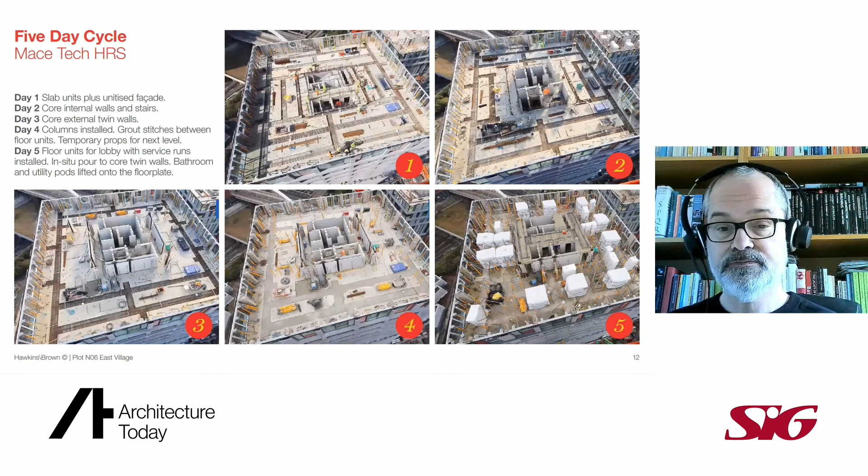Despite me saying we need to bring considerations of the method of construction earlier in the design process, this project wasn't actually designed at the outset with MMC in mind, but we did design it with a rational layout and a high level of repetition and stacking, which made using the Mace system relatively straightforward. The high-rise solution was superimposed onto an already developed floor layout, and only very minor tweaks had to be made to accommodate it. We didn't want the MMC approach to be overly apparent in the completed building.

To ensure that the original design intent wasn't compromised, we had to think carefully about where the unitized curtain wall panels coincided with floor slab panels and how they joined together, so that any doubled up mullions were expressed as a feature or partially concealed by the GRC attachments.

MMC is well suited to the build to rent sector, and using this approach has significantly accelerated the construction program, literally shaving months off a traditional build. For our build to rent client and their investors, this was considered extremely attractive, as they could get tenants in and generate rental income much quicker.